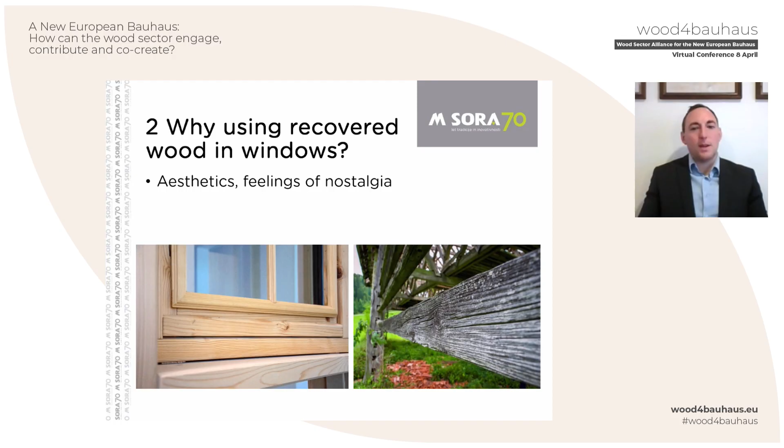The first one is aesthetics. The wood is aged and often weathered. It has a desirably unique look that's hard to find in new materials. Recovered wood, with its unique properties, wakes positive feelings inside us.

The second reason to choose recovered wood is because it has sufficient mechanical properties. This feature is especially important in windows with large dimensions. Elastic modulus of healthy recovered wood is in the range of virgin wood. Its hardness can be even larger.

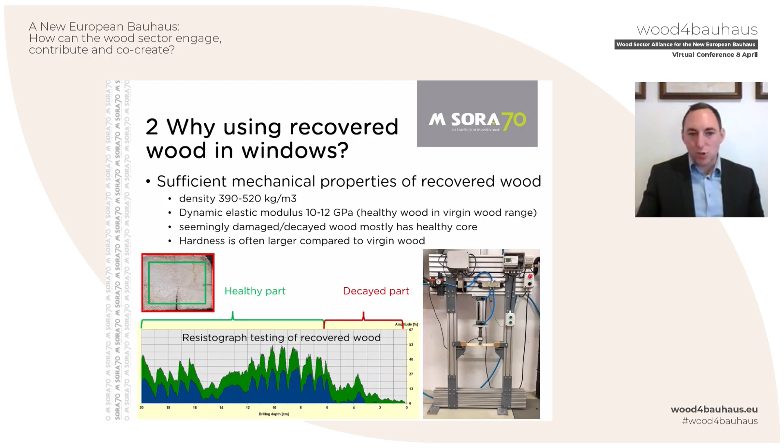By using recovered wood, we decrease demand for newly sourced wood, which helps curb deforestation. It also reduces landfill waste and the need to incinerate recovered wood, which could otherwise become a product with high added value.

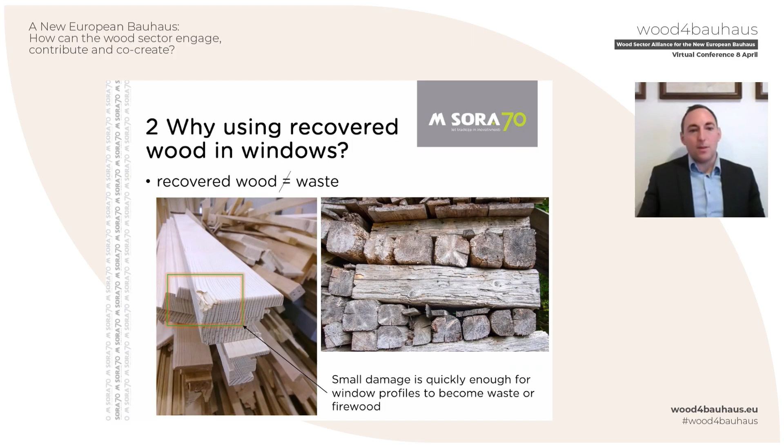With all presented reasons in mind, we developed a TREESU window with increased dimensions using recovered wood. TREESU window was successfully presented at 3W Factor competition inside Wood Circus project. Good practices across Europe in wood circular economy were being gathered, and we were amongst winners.

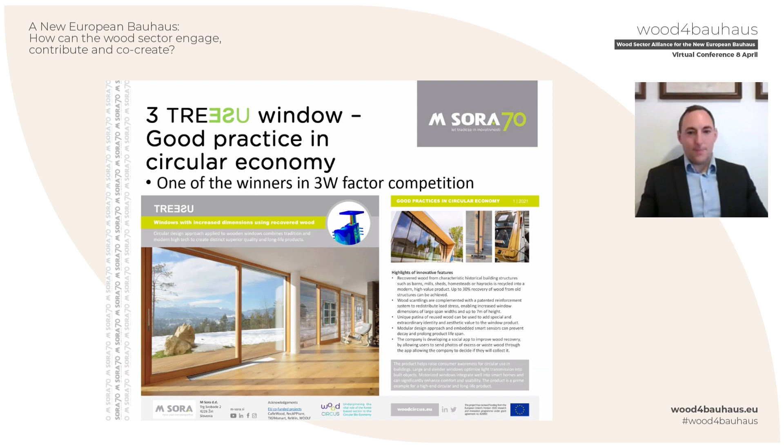Let's list TREESU window's 3 main components. First one is surely the use of recovered wood. It is collected from old demolished objects and old disassembled windows. In MSORA, wood is then cleaned, cut, glued into beams, and finally shaped into window profiles by milling.

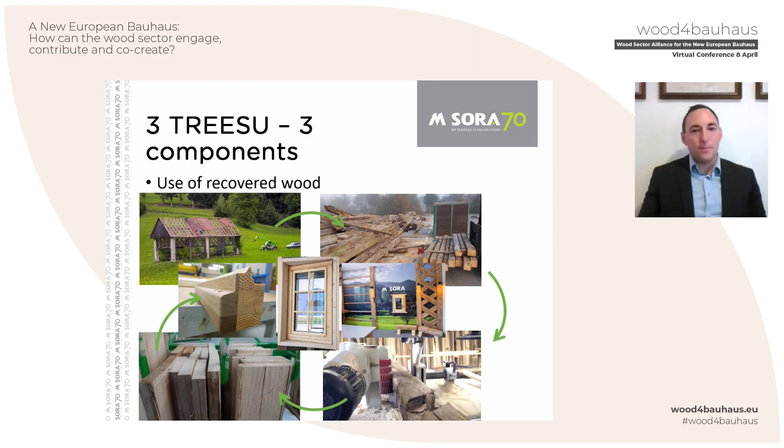With patented reinforcing system, we are able to produce wooden windows with exceptional height. Here you can see MSORA sliding door with total height of 4.5 meters. We can go even further and reach spans up to 7 meters. Large and slender windows optimize light transmission into built objects.

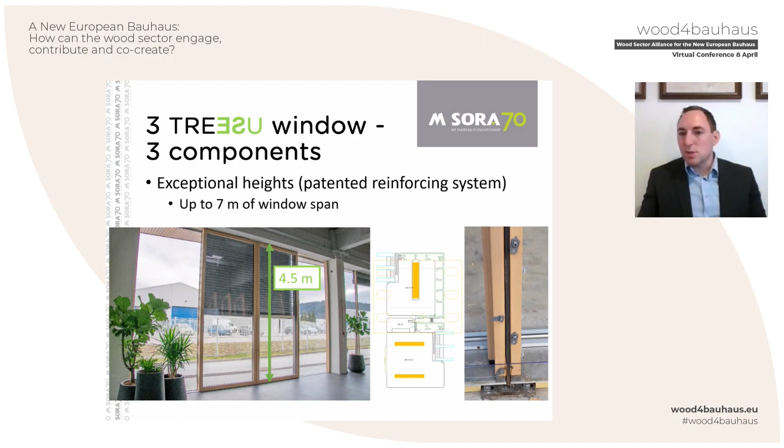The third component is making the window smart. IoT sensors are not only used for wood condition monitoring, but they also elongate service life of wooden windows with their machine learning ability. Windows can be motorized, and we are aiming to integrate them into smart homes, enhancing comfort and usability.

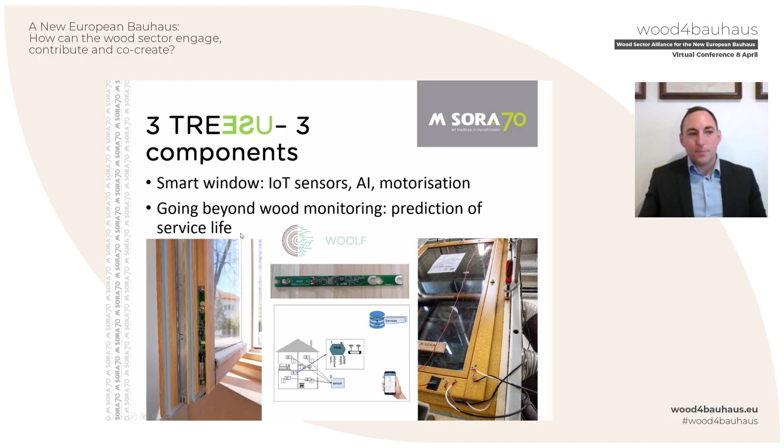Life cycle costing and life cycle analysis were performed for our TREESU window. Regarding LCC, main factors contributing to the total cost are glass as a material and labor. In case of recovered wood, cost for wood is lower, but cost for labor is higher because more wood processing is involved. On the other hand, in case of virgin wood, cost for wood is higher and cost for labor lower because less wood processing is involved.

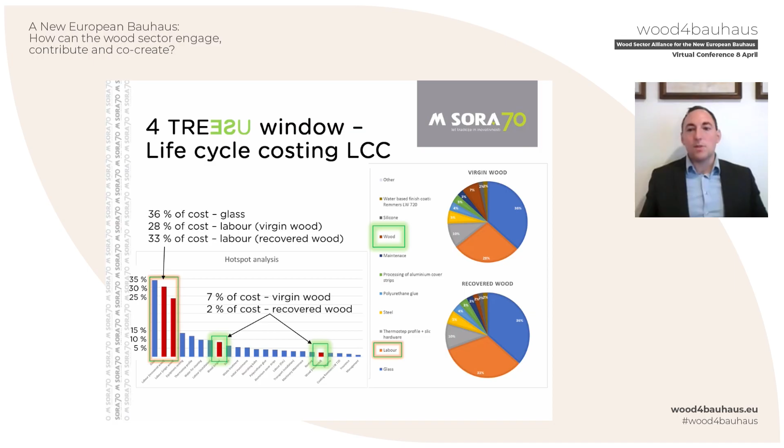Regarding LCA analysis, we see that using recovered wood reduces negative environmental impact. In case of large windows with 3 glass panes of 8 mm thickness, up to 2.6% positive impact can be gained using recovered wood. However, larger quantities of glass blind the positive impact of using recovered wood.

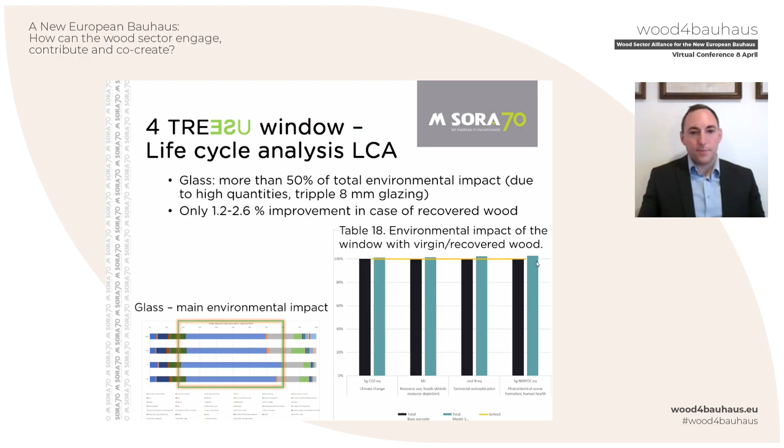We therefore performed sensitivity analysis with reduction of glass quantity in window. It can be seen that removal of one glass pane causes 15% reduction in environmental impact.

Positive impact of recovered wood usage is evident beyond LCA analysis. It reduces pressure for deforestation, connected with economic development of wood sector, and good practices also encourage decision makers to promote seeing existing wooden buildings as a material bank for the future.

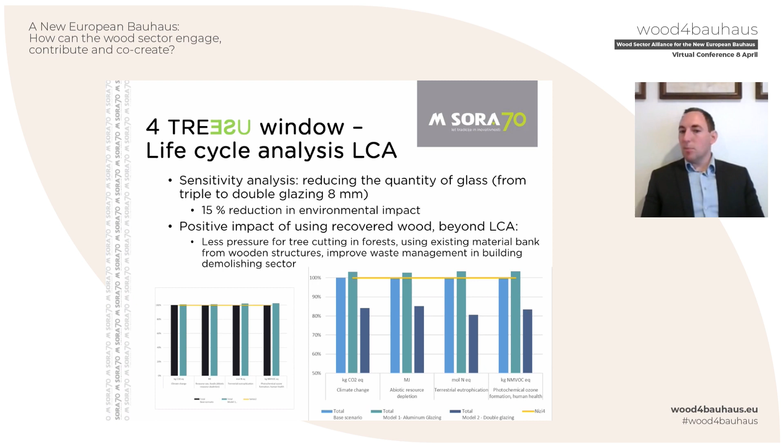What are the quantities of recovered wood to be at hand? We compare different data for year 2018. In MSORA, 75 cubic meter of recovered wood were available. In Slovenia, 94,000 cubic meter. And in 28 total European countries, 56 million cubic meter of recovered wood were available. Of course, not all of available wood is suitable for use in window products, but quantities are still unimaginably large.

A lot can be gained using recovered wood. However, it has challenges. Cracks and insect holes reduce the total quantity of suitable recovered wood. Care has to be taken to remove all protective coatings and steel nails inside wood. Unremoved nails can be especially harmful for machinery because they damage blades in cutting and milling machines.

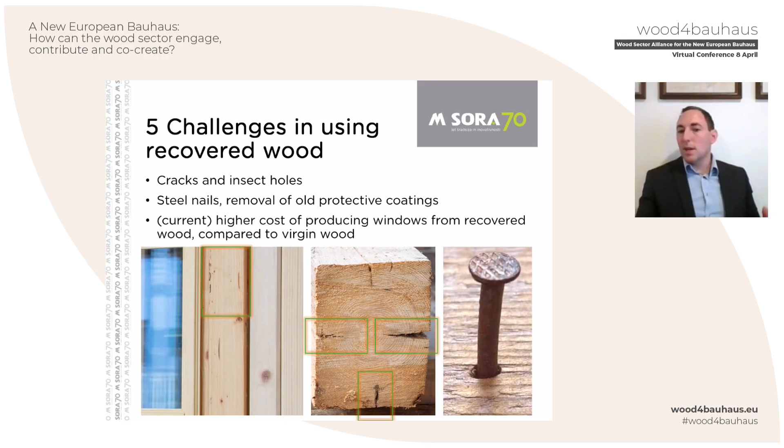Currently, the total production cost of recovered wood windows is higher compared to virgin wood. Main reasons are all the additional processes recovered wood demands.

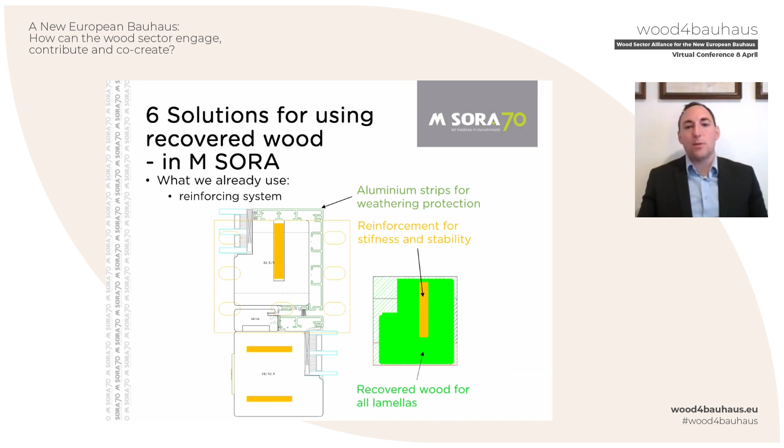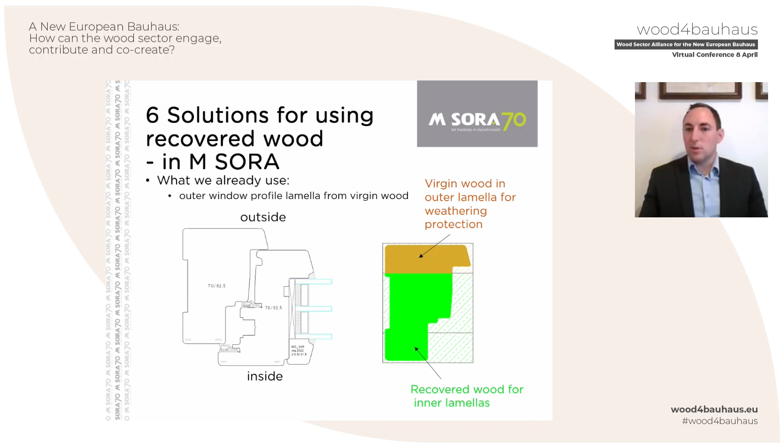To surpass all challenges using recovered wood, we used modified and innovative approaches. Aluminum strips present suitable weathering protection on the outside. Reinforcement of wooden profile provides stiffness and stability of windows. In case of wooden windows with no aluminum coverings, we use virgin wood for outer lamella as it ensures weathering protection.

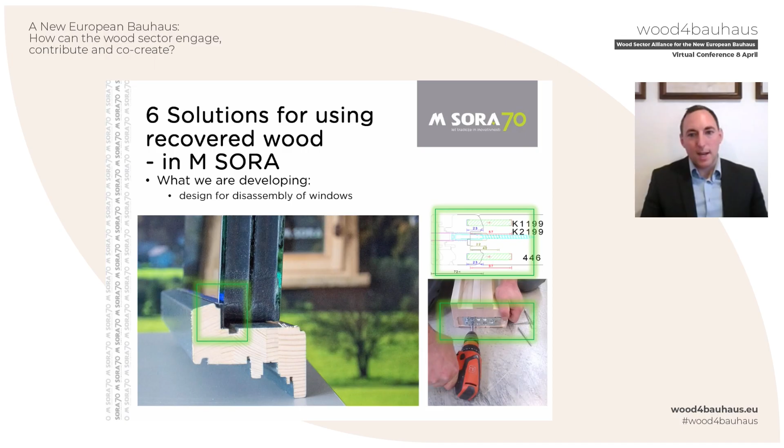In MSORA, we are also developing design for disassembly of windows. Besides simplifying installation, it will also allow easier recycling and reuse of all window components in the future. In society, economy, we must all do our part. Many innovations are waiting to see daylight. Many more will have to be developed to create a balanced and working circular economy.

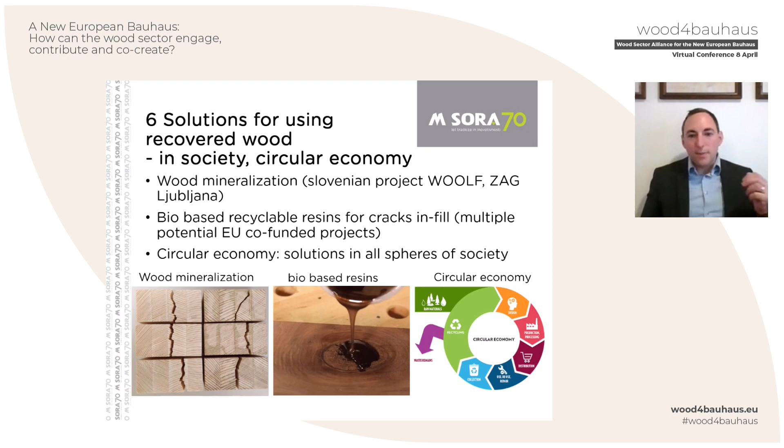Let's mention just one example of innovation. Besides Slovenian project WOOLF, wood mineralization process was developed, which includes nature-friendly materials. It elongates wood service life and covers it with unique gray patina, which fits well with recovered wood patina.

Before I finish my presentation, let's make a reflection of why we do what we do, why we chose recovered wood in M SORA. Firstly, we chose it because we are able to make new value-added wooden products, which our customers like and love.

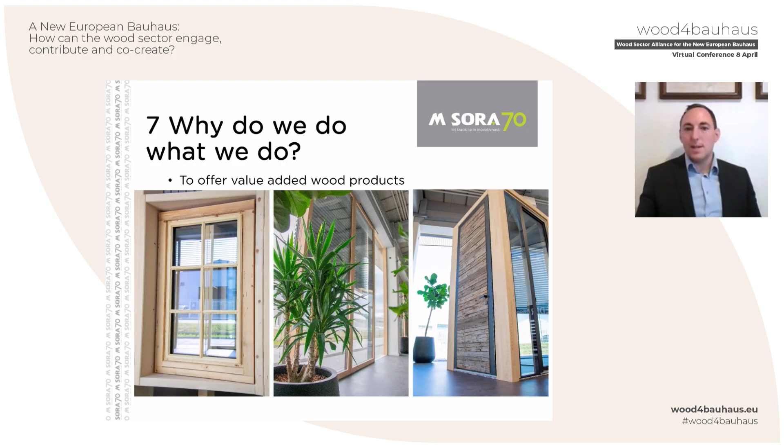Secondly, with doing that, we are raising a much-needed awareness about the importance of preserving cultural heritage objects. With our example, we also promote using elements of decaying structures in new products instead of typically using them for incineration.

And thirdly, we are joining two unconventional phenomena. On one side, we have tradition. Recovered wood was often treated with traditional carpentry methods. Wood has rustic, rough surface covered with patina.

On the other side, we have innovation. We use modern numerical approaches to model window performance. Our reinforcement system allows us to produce windows with increased dimensions and transmit more light into our homes. Wireless sensor technology not only monitors wood, but extends its service life.